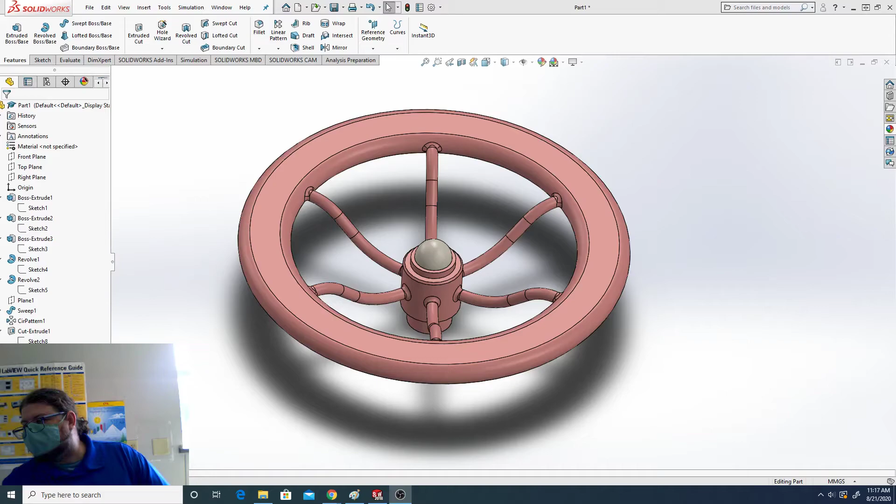Okay, in this video I want to talk a little bit about using the linear pattern tool.

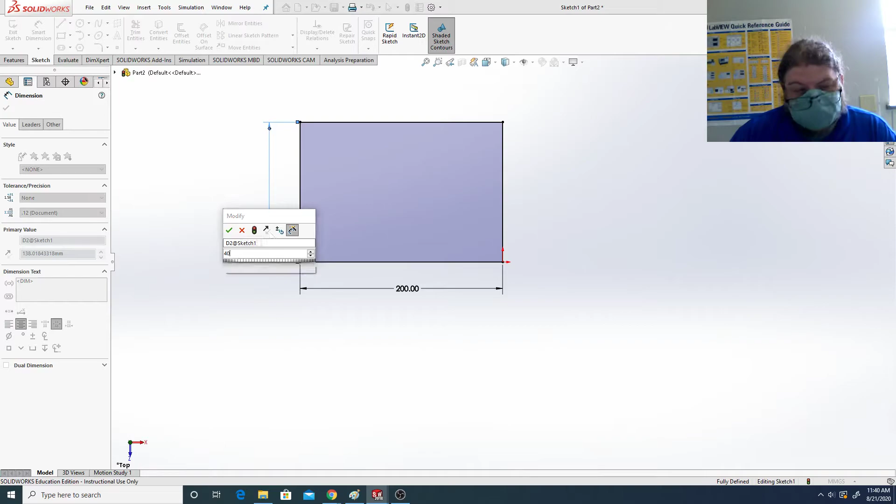So we're going to start out by making a rectangle. Let's make it, let's see here, maybe 200 by 400. That looks maybe 300. There we go. And let's extrude that just a little bit, so we're going to do like a 5mm extrude.

So we kind of have this thin sheet here. And what I'm going to do is I'm going to create a shape like a rectangular cut in one corner, and I want that cut to be kind of patterned a couple times upwards and a couple times to the right.

I'm not going to do all the dimensions to make sure it's perfectly patterned in this. I just want to give you a rough idea of how it works.

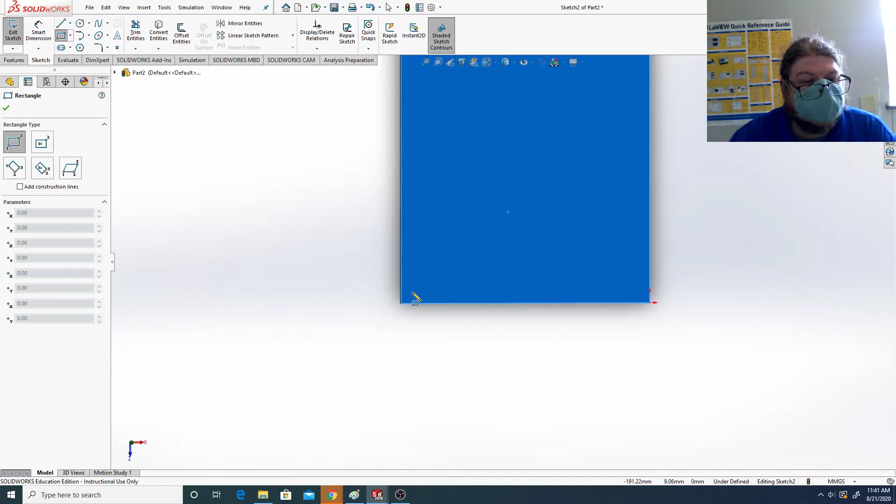So let's open a sketch, and let's say that we have this rectangular shape here and we want this to be, let's say, 10mm off the edge there. We want it to be 10mm off the edge here. I want this to be 15mm by 25.

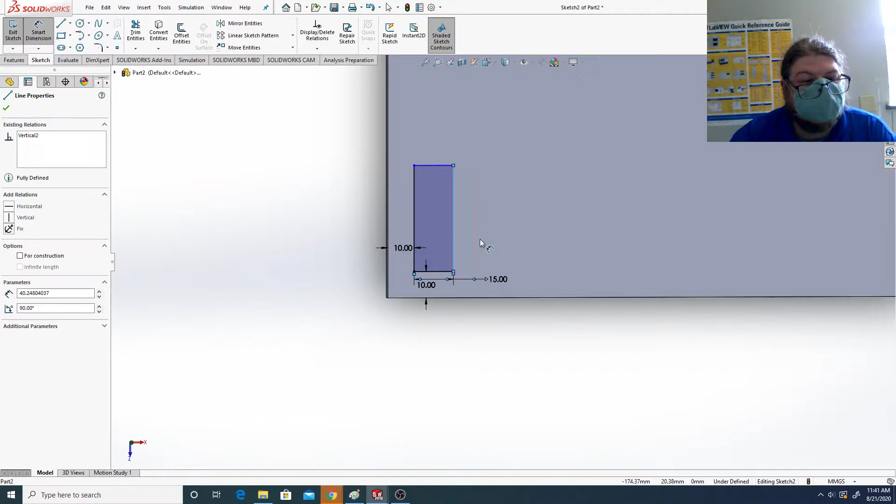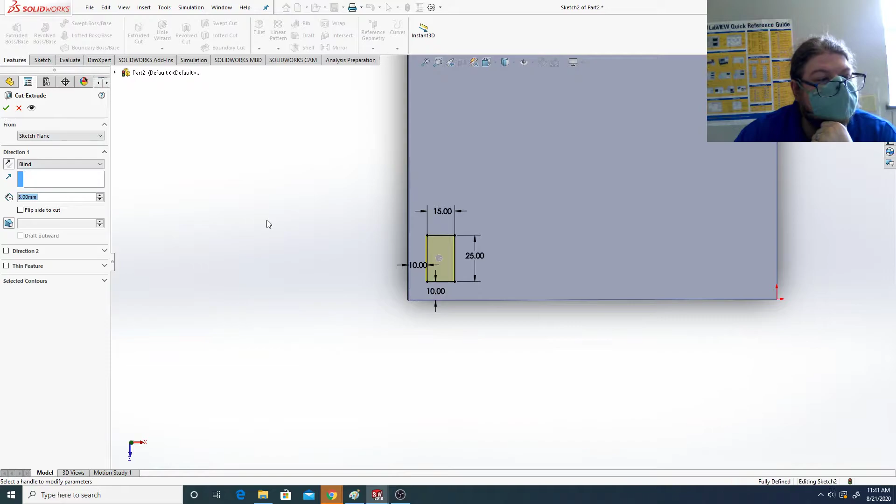So I have this little rectangle here that is 10mm off each of the sides. And I'm going to extrude that cut, so I'm going to go extrude cut and say I want to make sure it punches through the bottom, so 5mm is fine. So we have this shape here with the single little rectangle.

Now what I want is I want to create a pattern where I have 4 of these rectangles, so 4 more extending off in this direction, and I want a pattern of 5, I think, extending upwards, and I want them spaced 5mm from each other.

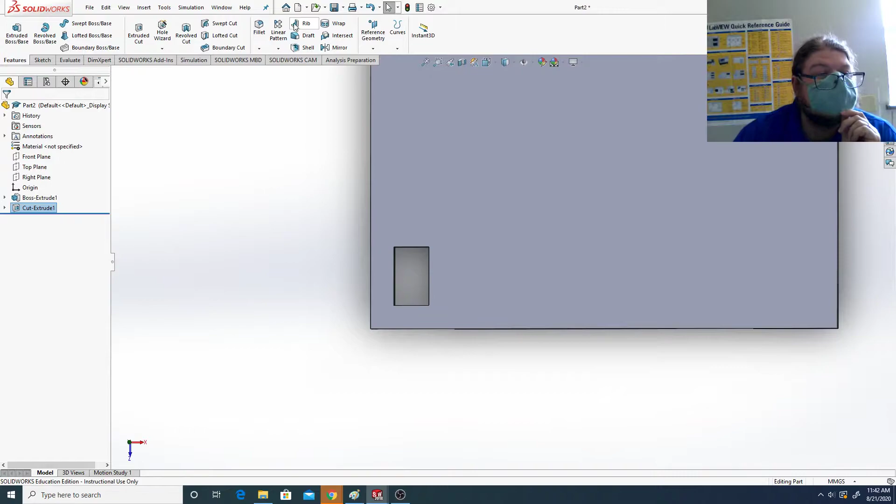So we're going to open up linear pattern, and the first thing it asks me is what's direction 1. So I'm going to click the bottom edge here for direction 1. Then it says, hey, what's direction 2? So I'm going to click the up-down edge there for direction 2.

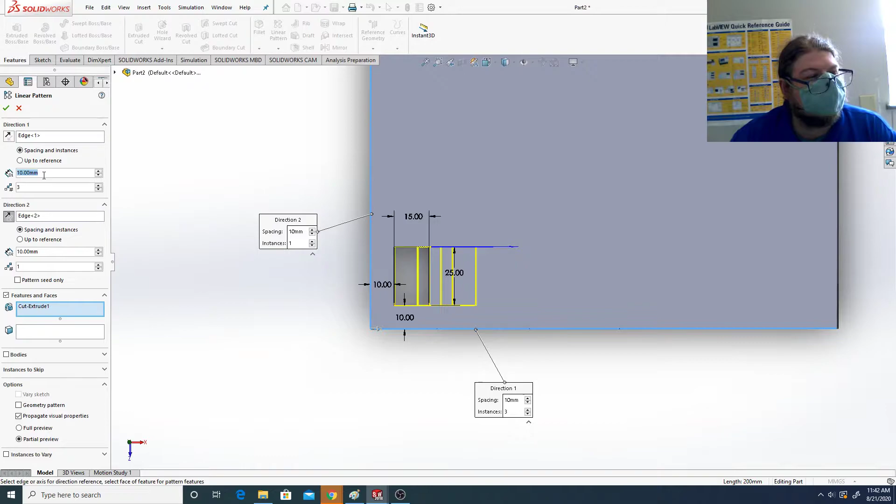Currently my spacing is 10mm. Since these are 15mm and I want an extra 5, I think I need to make the spacing 20. Okay, and now I got, since there's 3 of them, I got 3 copies of that shape with 5mm gaps in between them.

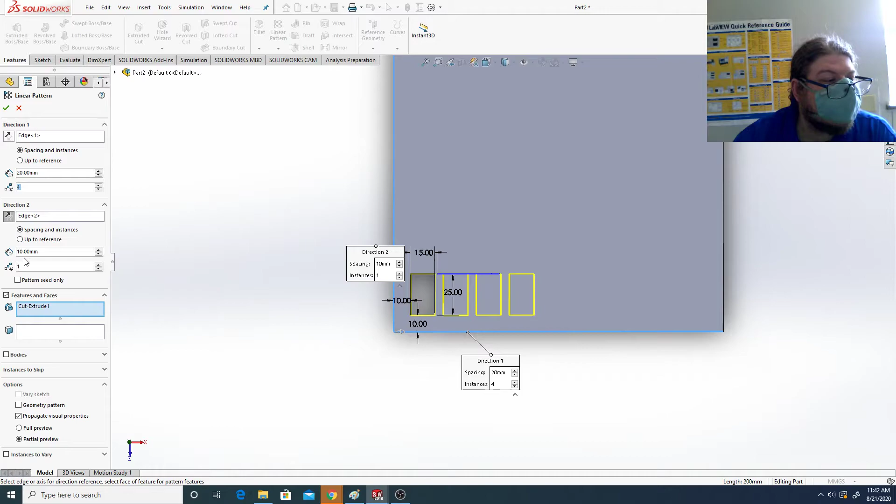We said we wanted there to be 4 of those rectangles in this direction, and then I wanted there to be 5 upwards. So this thing is 25 tall. If there's 5 spacing, I need to make it 30. So the distance needs to be 30. And I wanted 5 of those upwards.

So now I have my pattern that I was wanting. It's 4 rectangles this way, 5 tall, and we'll say okay, let's do that.

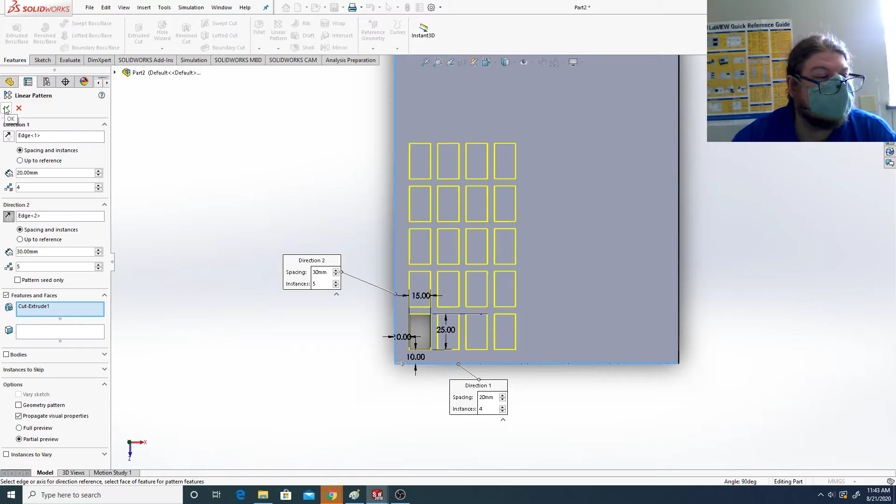And so I've got my base shape and I've cut this little pattern out. Now on the base shape, let's say I want to create the rest of this stuff that's not that little bit - I want to cut it out and I want it spaced kind of similarly.

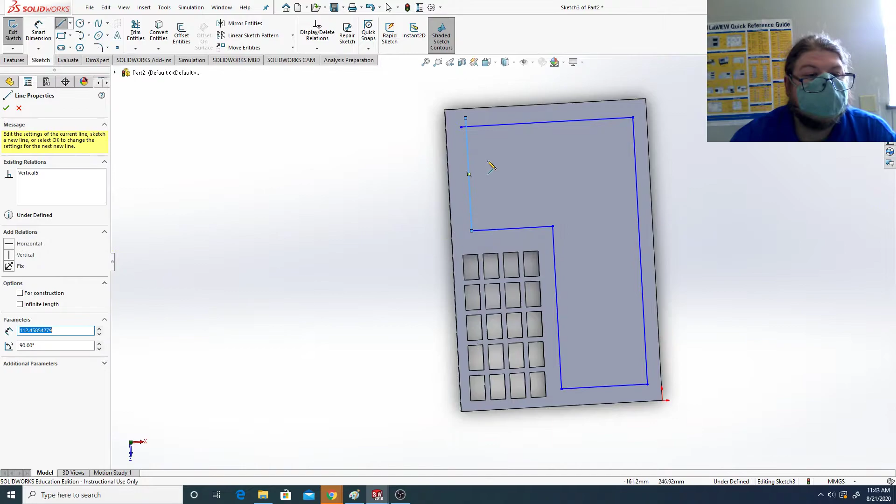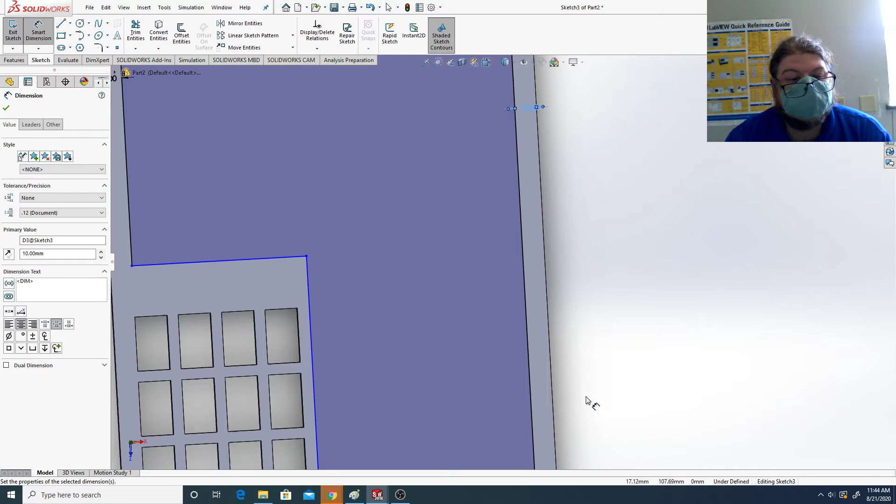Okay, so what I did here is I extended - these two don't meet very well, so I like using the scissors to just kind of clip the ends off. So let's set this to be 10mm off the edge there, 10mm off the edge here, 10mm off the edge here, and down here 10mm off the edge.

Whoops. Press the delete key, 10mm. And then this I want to be 5mm - I want it to match the spacing of the grate for the rest of this stuff.

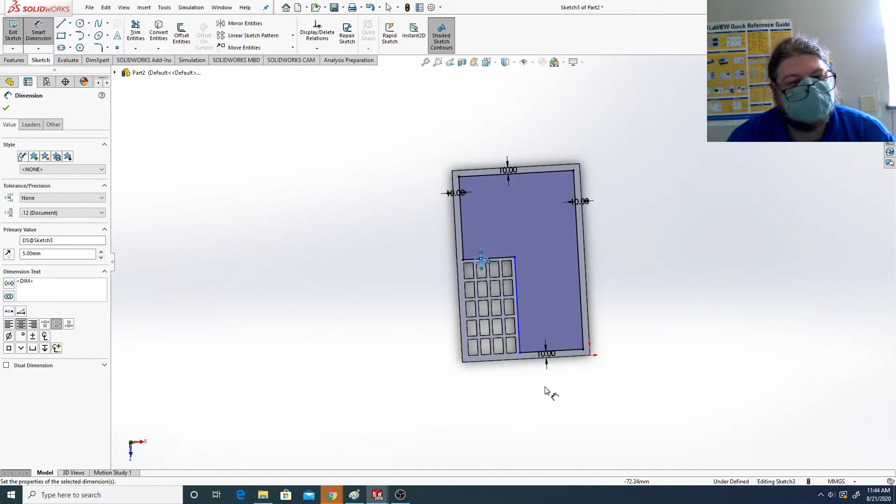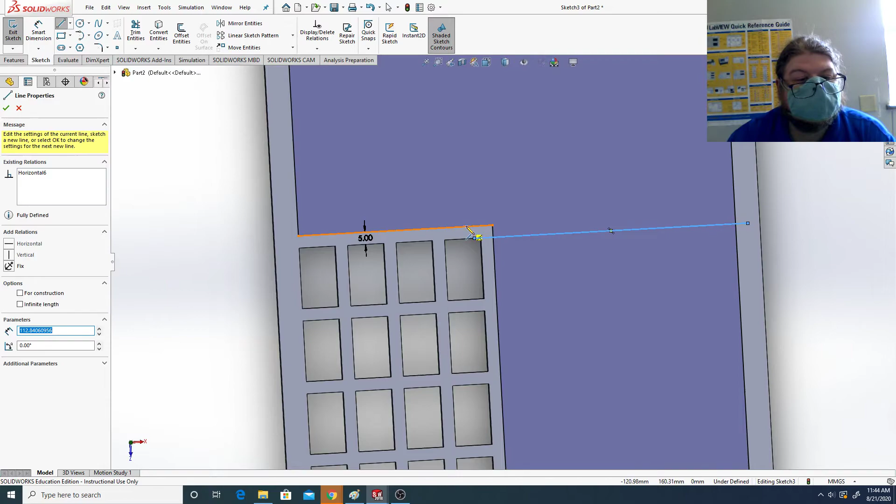You know what? I don't like the way this is gonna look, so I do want to extend this out 5mm, and I want to extend this across 5mm, and let me re-clip this because there's overlapping between stuff now.

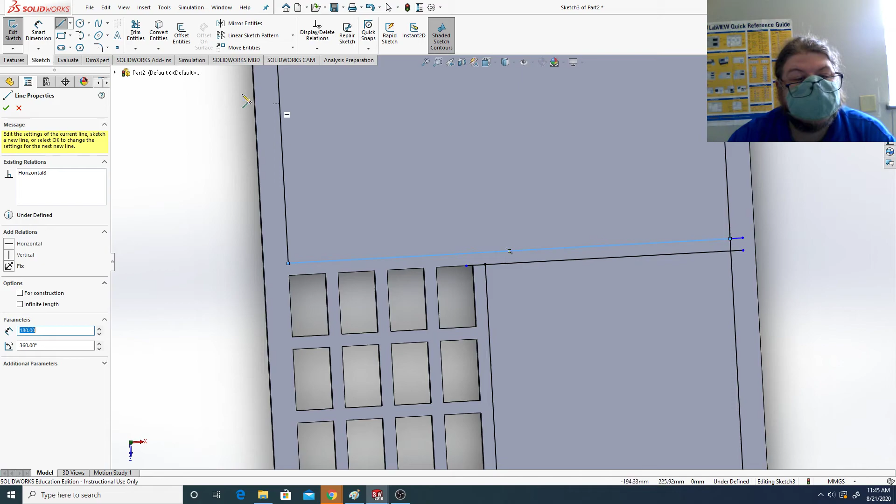Making some mistakes here. Okay, I want that like that. And then I'm going to retrim the stuff here, there, there. And I want to extrude these cuts on through, and we'll say okay, that's good enough.

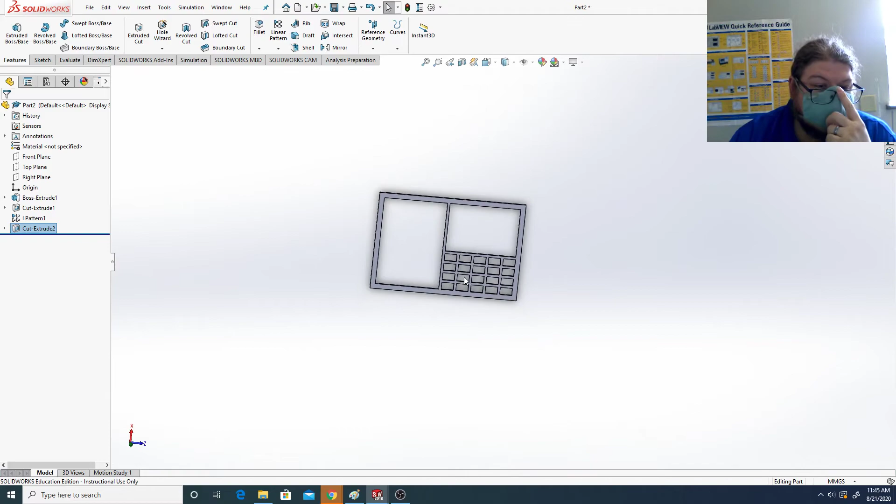That's kind of the shape I want now, suppose. And let's say we want to make this out of some sort of aluminum alloy. So we can right click on materials.

Okay, so I could just do what I did the other video, and I could go back to appearances here, and I could go through and look under aluminums, and I could set this to have some sort of aluminum appearance, but that wouldn't update the material.

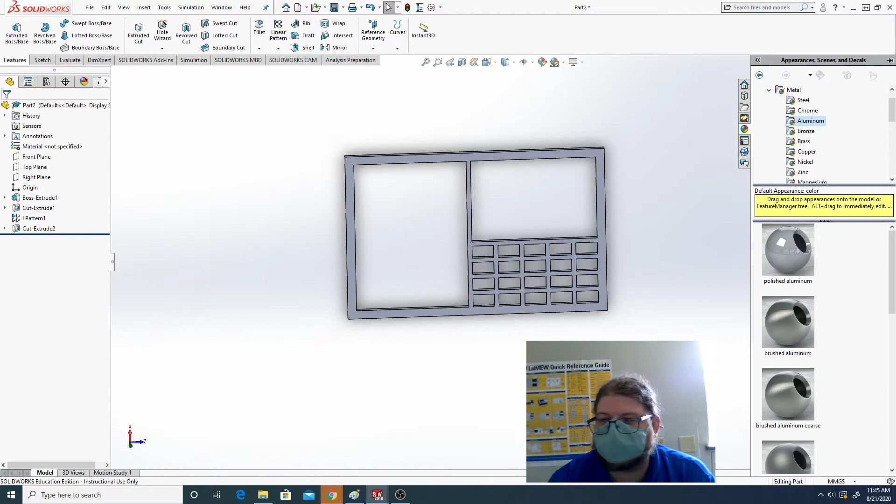So what I want to do is, I want the material to update so I could look at like the mass and the properties of it. So I can right click here, I can go to edit material. I got to give my computer a minute to think because for whatever reason it takes a little while to pop up edit material on these.

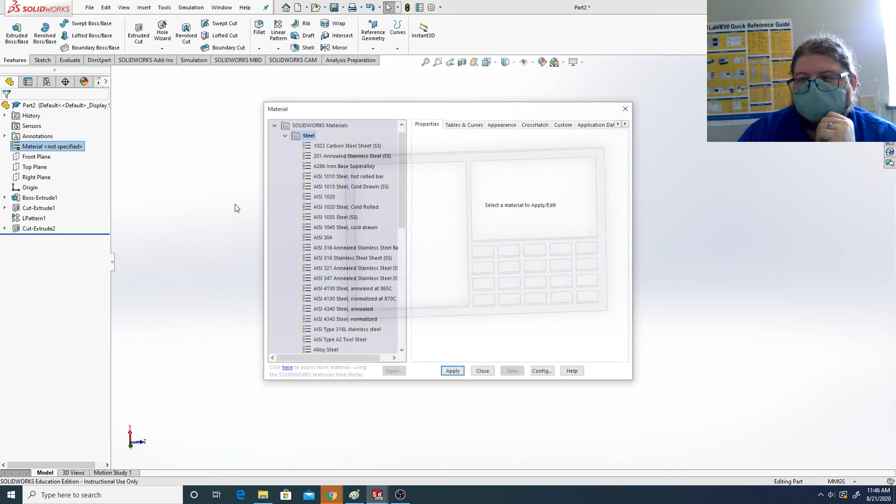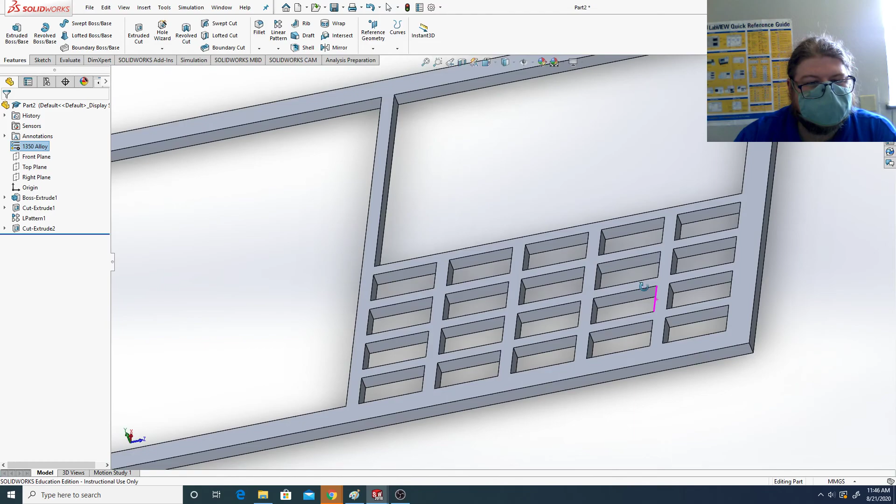There we go. Let's see, we wanted aluminum alloys, and let's say I want the 1350 alloy, so I can apply that. So now my materials, instead of saying materials, says 1350 alloy. I'm going to X out. So this now has that aluminum appearance added to it. It's kind of hard to see, but it's now taking that aluminum appearance.

And if I go to evaluate and I go to mass properties, it can tell me like what's the mass, what's the volume, what's the surface area, what's the center of mass. These mass and center of mass calculations, if you forget to choose a specific material type, it'll just be the default mass, which probably isn't what you want if you're building something.

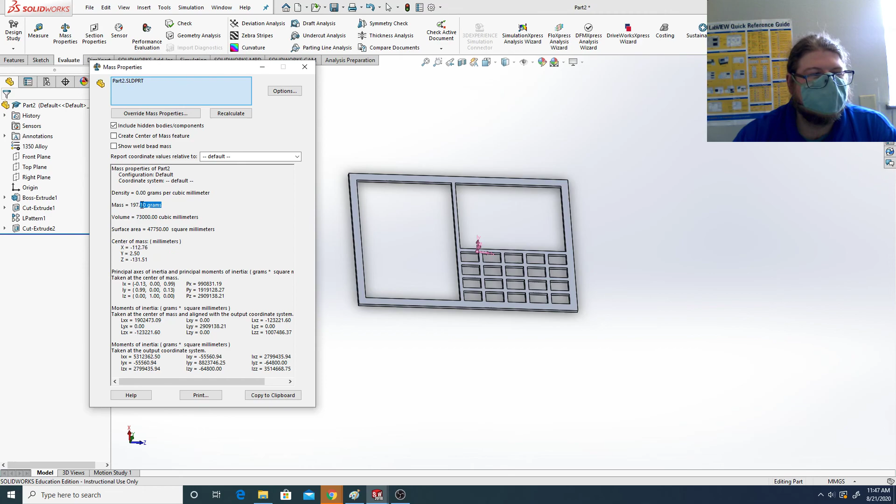So most of the time, if you're told a part's supposed to be made out of a certain material, you have to load the material in there so that your stuff here is okay. Okay, so we'll say that's good enough there. Stop on that part.